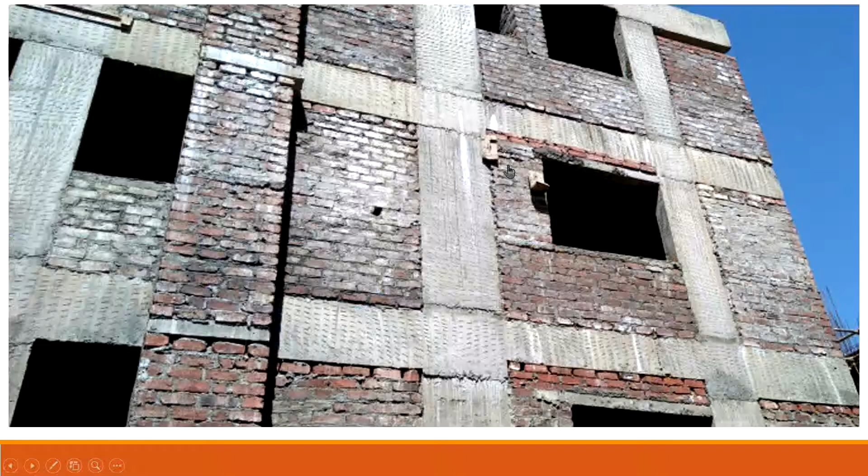Normally this is the external uneven surface plastering. We do it with the waterproofing compound with 20 mm thick plastering. See here, we are talking about 20 mm thick plastering. After seeing this picture we can understand how many undulations there are. See here, this beam is not in line with the above and bottom brickwork layers. So automatically the cement mortar quantity will be more than what we consider for 20 mm thick.

Not only that, see here some of the joints were not filled properly while constructing the brick masonry. All these voids we need to fill while applying the plaster. So automatically the plastering quantity will be more.

Now we'll calculate. This is the normal BOQ description. Waterproof plaster 20 mm thick in 2 coats with base coat of 16 mm thick in cement mortar 1:4 and top coat of 4 mm thick in cement mortar 1:3 with Dubara sponge finishing, mixed with integral waterproofing compound of Fosroc or equivalent make, with prior approval from the engineer in charge.

Mixed in the proportion recommended by the manufacturer, including cost and conveyance of all materials like cement, sand, water, etc. to site, cost of seigniorage charges and all other taxes, operational incidental charges and all labor charges, mixing mortar, finishing, scaffolding, lifting charges, curing, including cutting grooves, etc. as directed by the engineer in charge, complete for finished item of work for external uneven plastering 20 mm thick in cement sand mortar. Location: external wall surfaces, uneven surfaces, with waterproofing compound. Unit: 1 square meter.

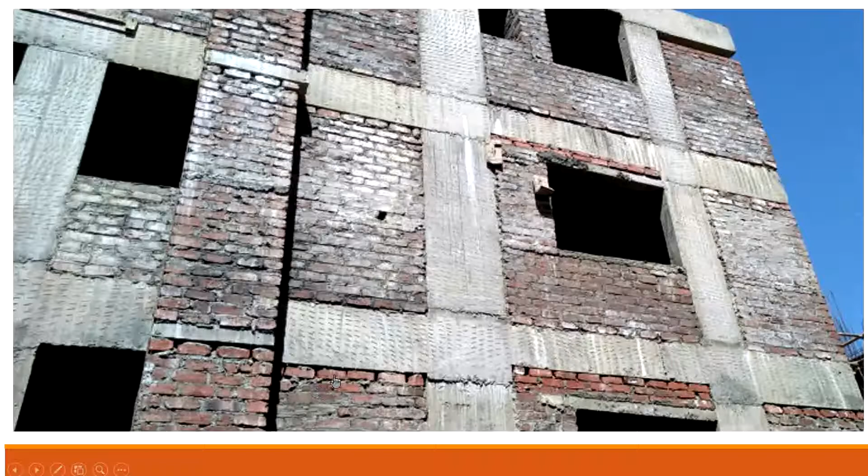Add extra 30% for filling of raking joints and covering of undulations, line and level in the wall. See here all these undulations, all these voids in the masonry; to cover all those things we need to add 30% to the wet mix. So now the wet mix volume is 0.016 plus 30% of 0.016, which is equal to 0.0208 cubic meter.

Then add extra 25% for dry volume, that is the wet mix of 0.0208 plus 25% of 0.0208, which is equal to 0.0260 cubic meter of total dry volume of cement and sand mortar for the base coat of 16 mm thickness.

Then cement we will calculate. So total dry volume of the cement sand mortar, 0.0260 multiplied by 1/5, means total sum of the factor 5 into cement proportion 1, that is equal to 0.0052 cubic meter of the cement. 1 cubic meter of cement is equal to 28.8 bags, that is equal to 0.15 bag per 1 square meter of 16 mm thickness.

Sand: total dry mix of the cement and sand mortar is equal to 0.0260 divided by sum of the proportions 5, multiplied by the sand proportion 4, that is equal to 0.021 cubic meter.

Similarly, finish coat thickness is 4 mm. See the specification, top coat of 4 mm 1:3. 4 mm thickness, 4 divided by 1000 is equal to 0.004 meter. Cement to sand mortar 1:3, 1 part of cement and 3 parts of sand. Sum of the mix ratio 1 plus 3 is equal to 4. Wall area assume 1 meter by 1 meter, 1 square meter. Wet mix plastering volume is equal to 1 into 1 into 0.004 thickness, is equal to 0.004 cubic meter.

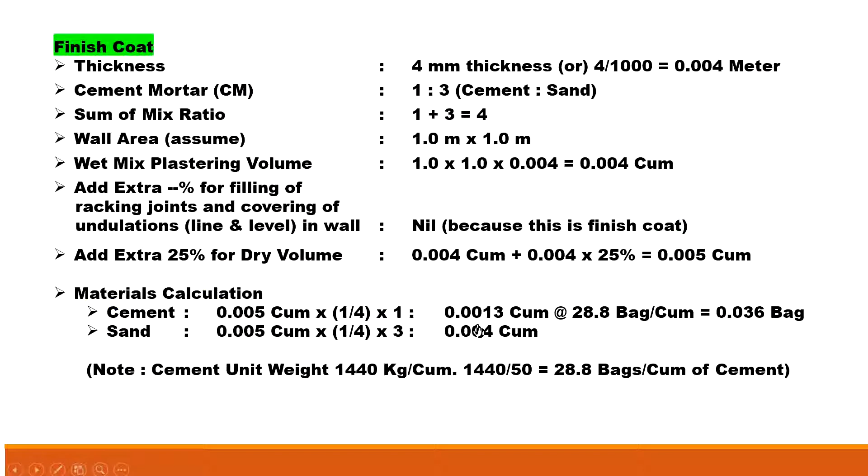Then the total material, base coat plus finish coat, per 1 square meter. Material cement, base coat how much? Base coat cement 0.15 bag, and finish coat cement 0.036, total 0.186 bag. Then sand, base coat 0.021 cubic meter, then finish coat 0.004, total is equal to 0.025 cubic meter.

Then waterproofing compound dosage as per the manufacturer recommendation. See here, this is the integral waterproofing liquid admixture for concrete, plaster and mortar. This is what is mentioned in our specification also: integral waterproofing compound of Fosroc or equivalent. Now we will discuss about only Fosroc.

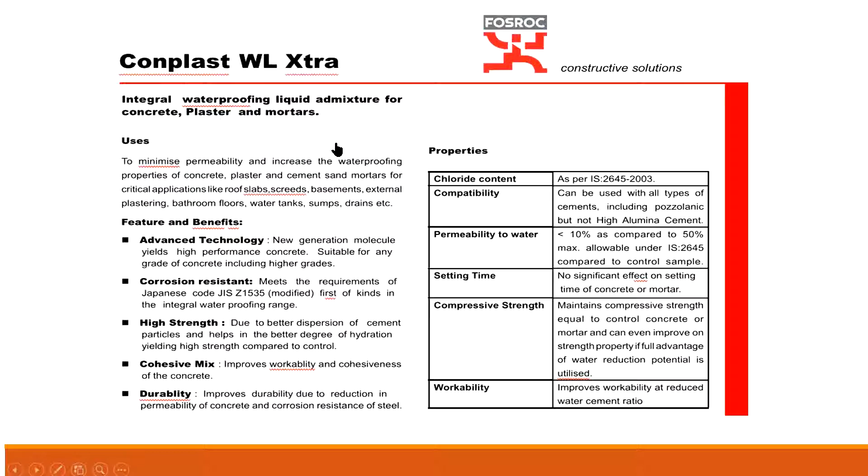See, Conplast WL Xtra is the liquid waterproofing admixture for the mortar. The recommended optimum dosage given here is 200 ml for 50 kg bag of cement. That's what we calculated here. For 1 square meter of this 20 mm with these proportions, how much cement bag is required? 0.186 bag. So 0.186 bags of cement into 200 ml per bag of cement is equal to 37.2 ml required.

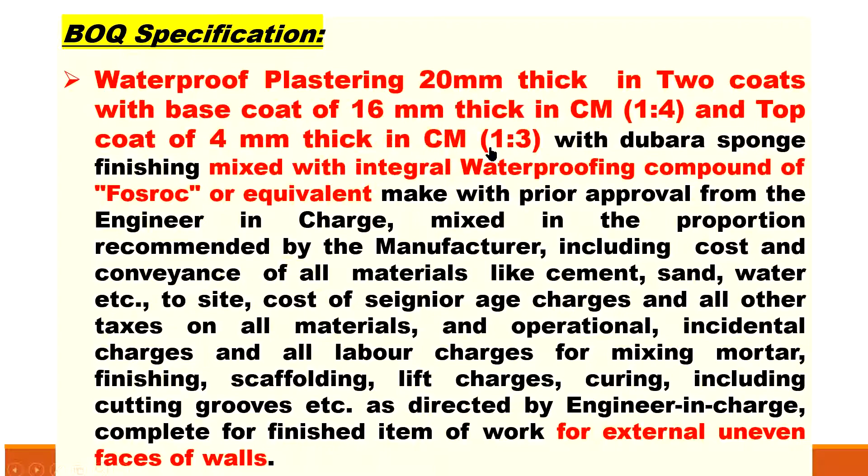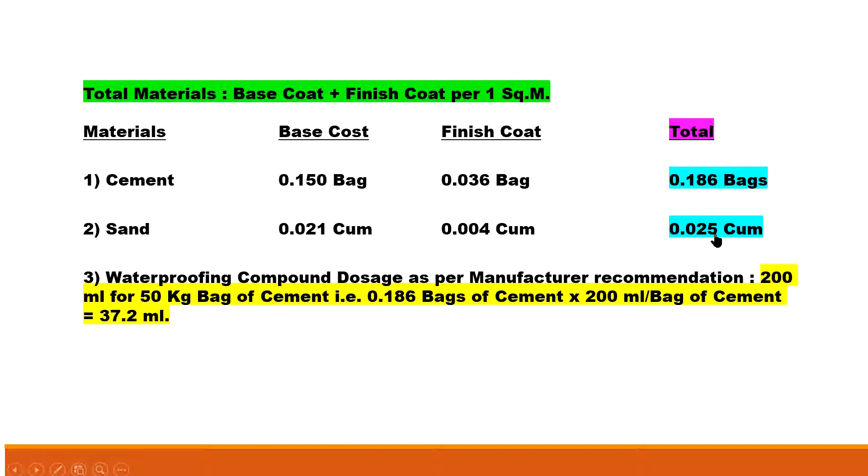So finally, to do the waterproofing plastering of 20 mm thick in 2 coats, with a base coat of 16 mm thick 1:4 and a top coat of 4 mm thick 1:3 with integral waterproofing compound of Fosroc or equivalent, we need 0.186 bags of cement, 0.025 cubic meters of sand and 37.2 ml of the waterproofing compound.